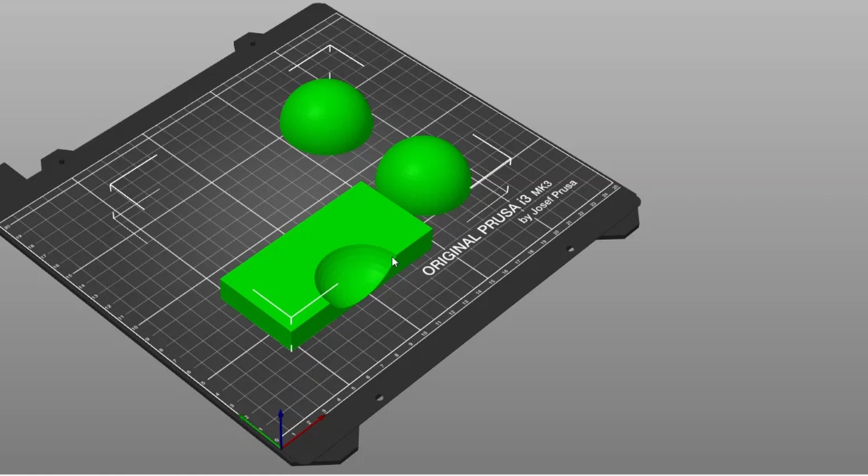But today we're going to explore something that came following the tournament. We have a group chat with all of the different players in it. One of the players, Tim Greenfield, suggested, why don't we build a rack for Lineball, so that instead of having to sort of spot the balls yourself, there could be a rack like you have with the triangle on an 8-ball table or the diamond shape on a 9-ball table.

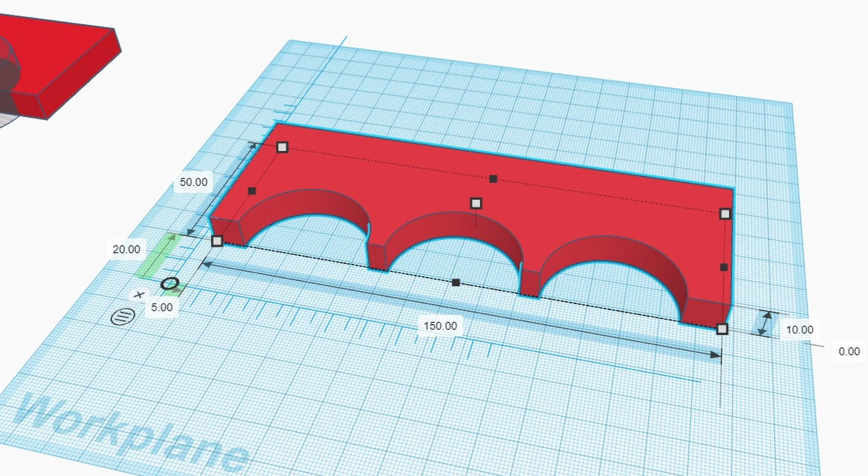So my dad, who played in the tournament, he does a lot of 3D design work. His name's Jon, and in this video he's going to be doing the first part, explaining through this 3D design he's doing for the rack for Lineball. If you don't know all the rules to Lineball, head back on the channel, watch the third ever video we did. It'll explain how to play, so you understand why we're making the rack and how he's doing it, and then come back to this video and you should have a really good idea of what Jon is doing. So let's hand over to Jon and learn more about the design.

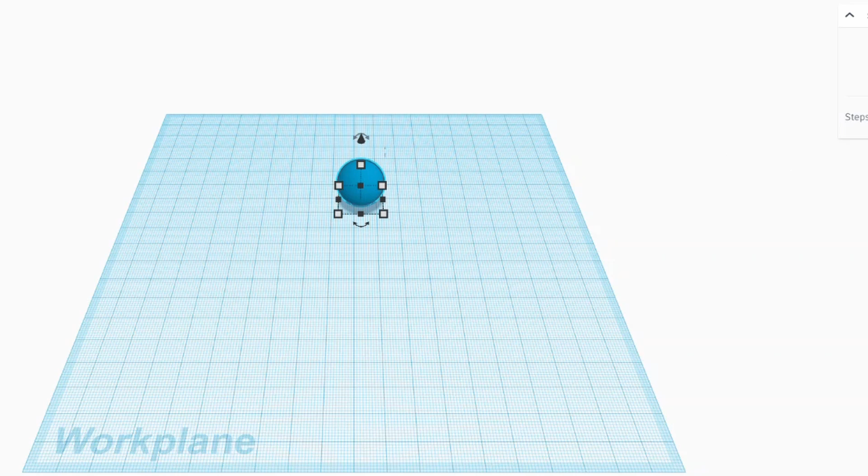So today is the day that we design the first prototype of the Lineball rack. So let's design it together. Now, to adhere to the sustainability rules, I'm going to prototype this in its smallest possible form, which is just one ball rack, so that we reduce material wastage. So first thing I'm going to do is create a ball. We'll max out the steps so it's as smooth as possible. Bring in some guides, and it's 51 by 51 by 51. So that gives us a concept of scale.

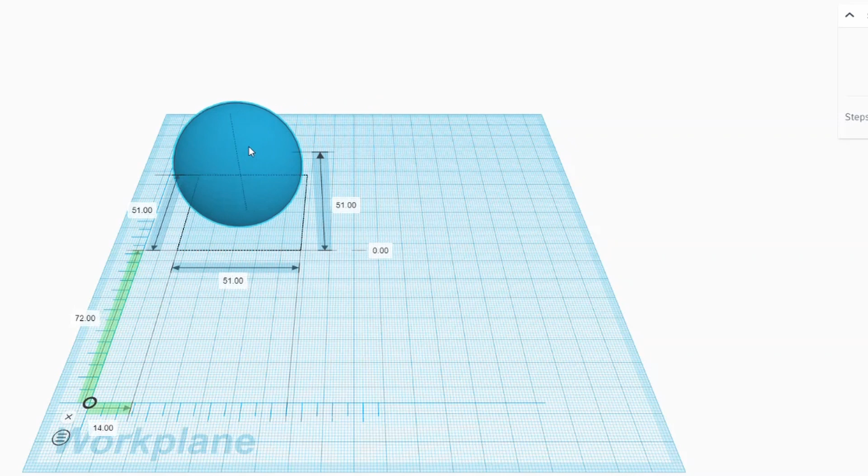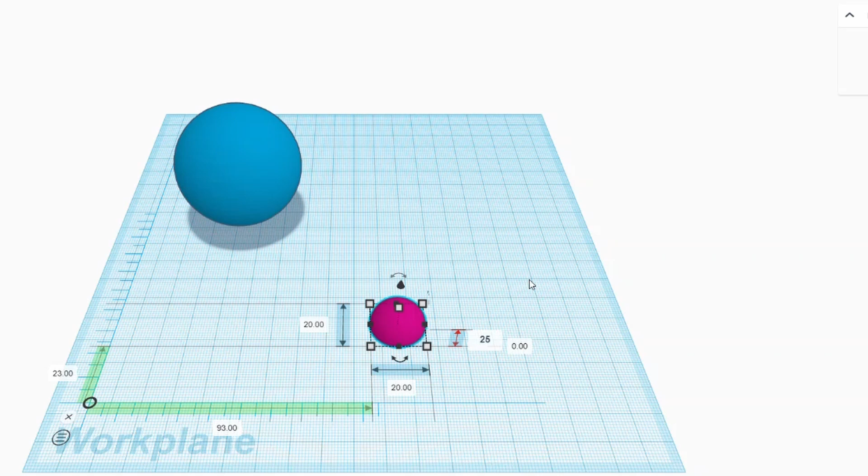For the actual ball itself, because I want to print one, I'm going to do it slightly differently. I'm going to do it in 2 halves, because printing this shape will mean we end up with a flat on it. So we need 25.5 and 51 and 51. I'll duplicate that, and I'll just hold that off the side. So I'm going to print 2 of those, stick them together, and that gives us our ball.

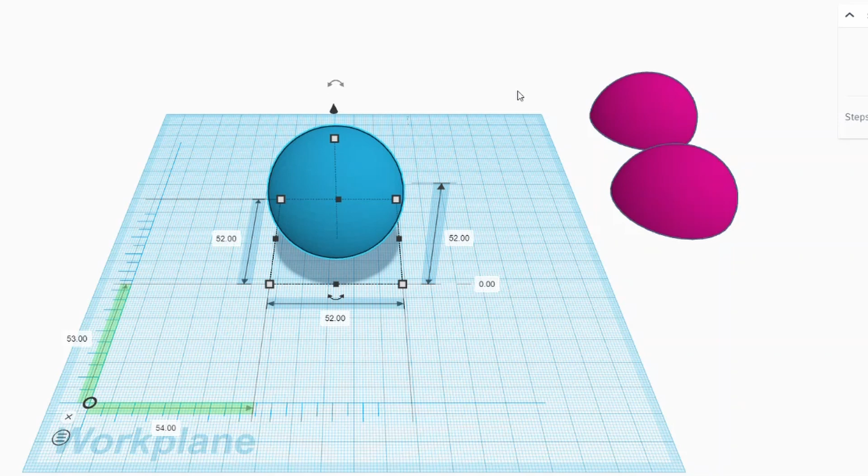Now for the actual rack, I'm going to do something slightly different because we need a bit of clearance. So I'm going to give the pocket 1mm clearance all round, I think, so there's a slight bit of play in it. So we're going to make the ball 52, and then that we will turn from a solid to a cutter. So there's our cutter. What we're going to do is bring out the beginnings of the rack.

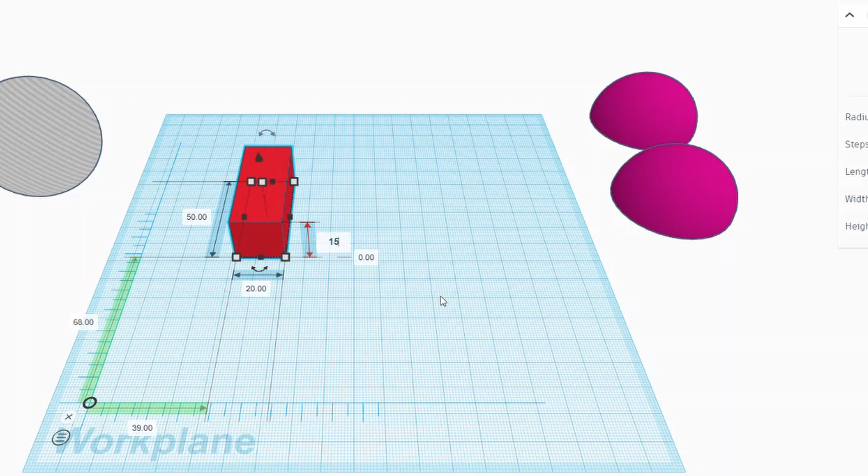We'll make that 50 for argument's sake, because it might as well be anything. I don't think it needs to be more than, say, 20mm high maybe. No, it's probably too high. Let's make it 15. And we'll make it 100 wide, just to give us a bit of play. Then my thought process was we really need to set this back into the pocket a proportion of the ball, so that it's locating it nice and neatly, but at the same time when the rack is pulled back it will clear perfectly.

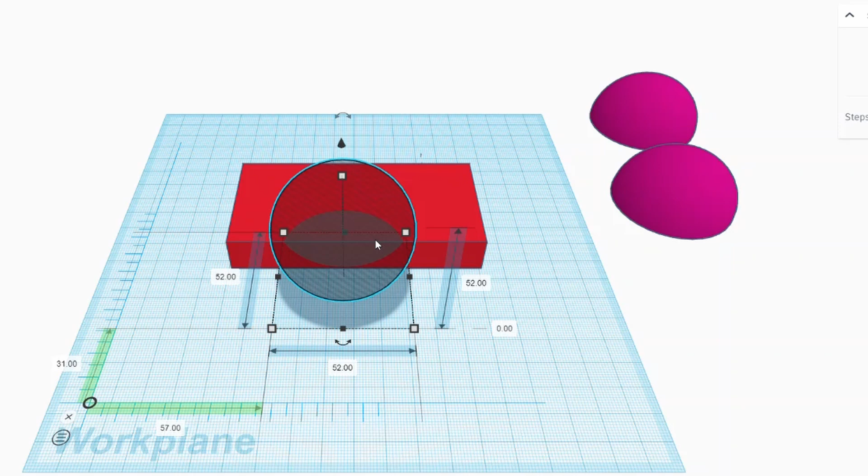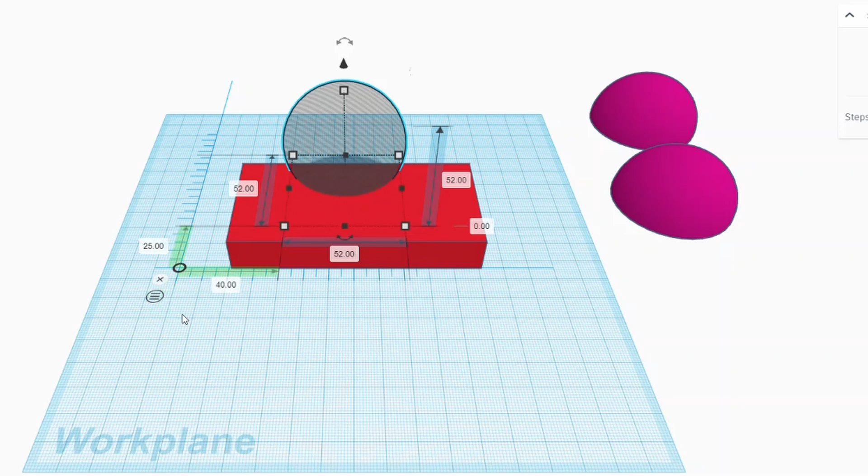So a quarter of the distance, if we just zero this out on the actual rack itself, so it's zeroed out, and then what have we got there? 31. So if we went, just for argument's sake, 25, just to get some. Oops, sorry, got the wrong dimension there. What we're looking at here.

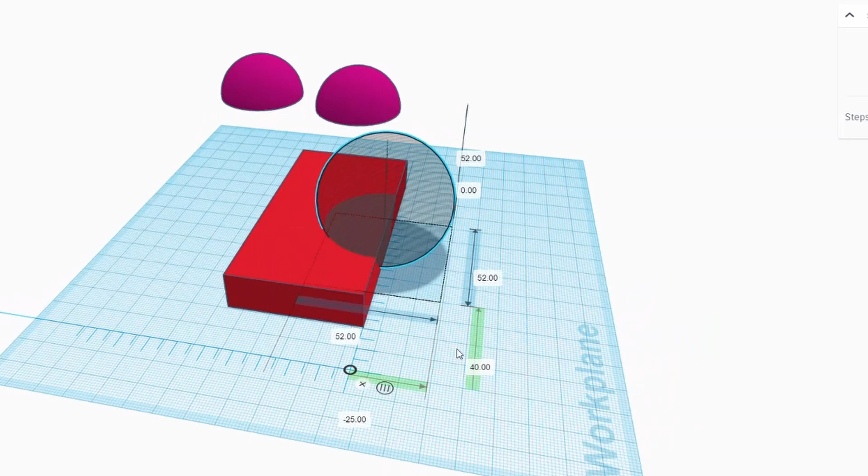Sorry, minus 25. Okay, that in theory is roughly half plus that little bit of clearance. So I think for the first test run, I'm going to run with this. Let's just have a look.

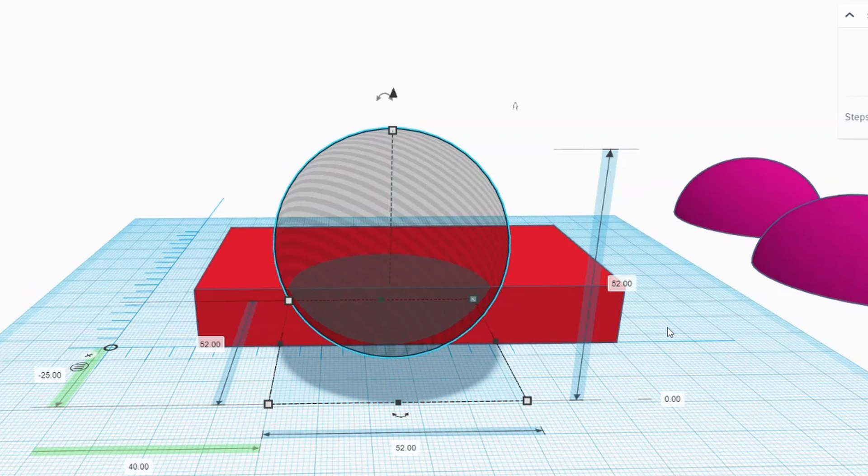So it's perfectly on the base layer. Perfectly on that base layer there. It's a half cut. As that is drawn away, I would imagine that shouldn't tip the ball too severely, but we will find out because this is trial and error.

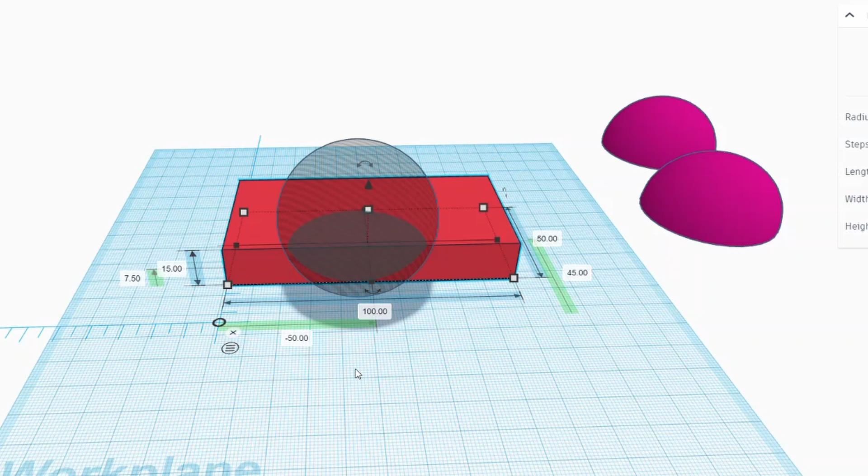Now we want to centre that really, so if we switch to centres, we'll set that to 0, sorry 20, so that's there. We'll just come in here like so, so that's minus 50, and I should centre this, that's 50, so that needs to be 50. No, minus 50. So that's centered on there.

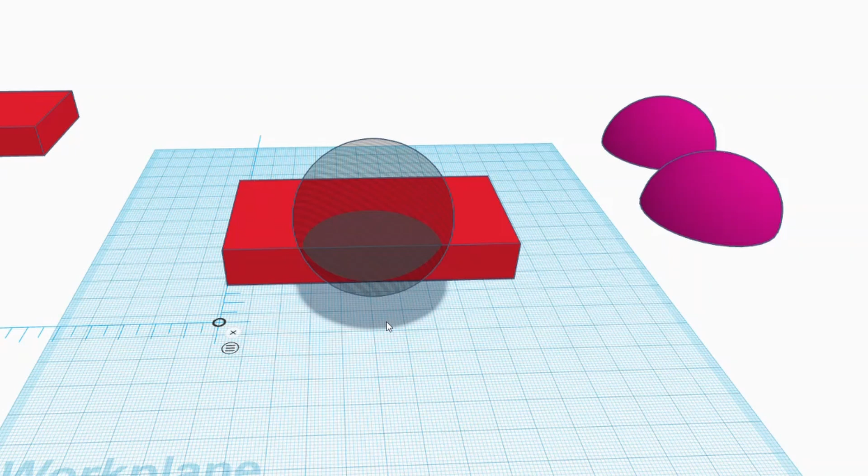So what we'll do now, we'll just save that and dupe it so that we can come back to that at a later date. We'll now cut that. That gives that pocket. Right, so that's test number 1. I need to print the ball at the same time. So I'll just bring that in and we'll do that as a single print run. Group that lot and export. Now what I want to do, STL, sorry, that's what I want.

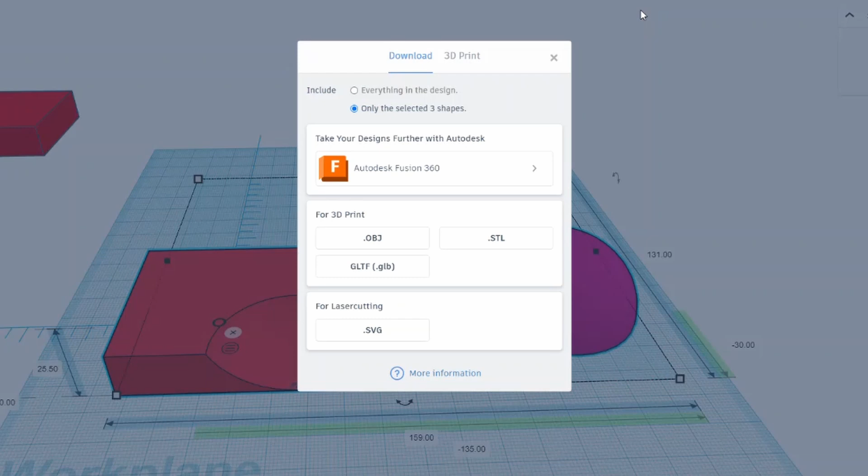Now I may need to switch windows with the screen recorder because this is now going to open in Prusa Slicer, which you guys might want to take a look at. There we go. Now my guess thinking about this is that there may well be way too much surface contact on this area of the ball, so when it pulls away it may try to kind of roll the ball forwards.

If that's the case but it holds the ball nice and squarely, then the idea is I'll probably add just a couple of tiny dimples, one to the back and one at about maybe 15 degrees on each of these faces, so that there's actually no surface contact at all. It's only point contact in 3 places. Therefore there should be virtually no friction. It should clear a little bit better, maybe.

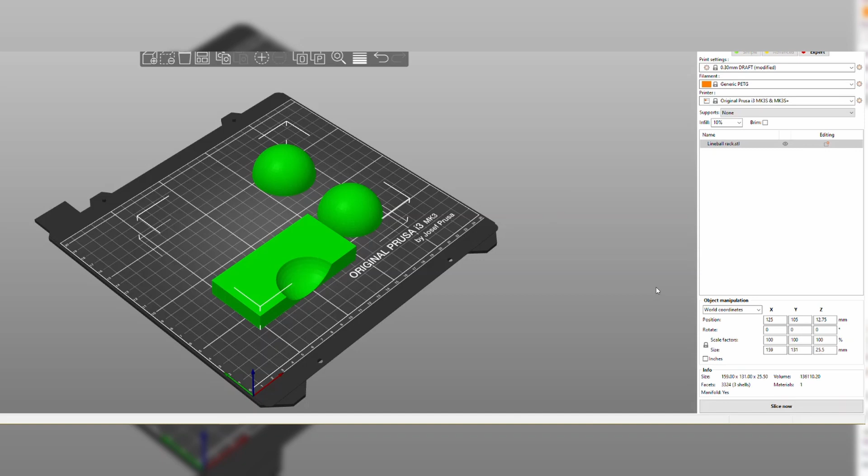So anyway, this is the first test, and we'll see where we end up with this. I'd imagine we'll go through 3 or 4 iterations to get it right. So we're going to put this into draft mode to reduce material consumption. Infill we're going to take right down, so we probably don't need to infill more than 10%. Again, saving material. Now slice that. Sorry, select and slice.

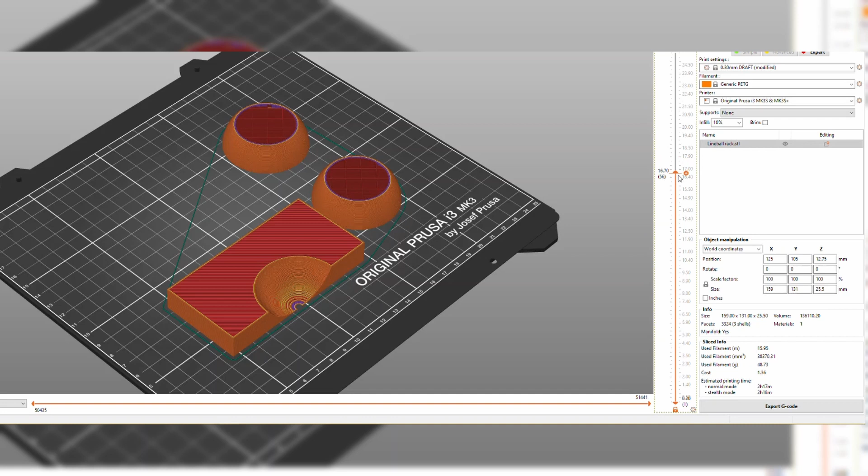Right, so there's our slice. The 0.3 mil is going to give us a bit of a flat spot on here. We can sand that down if necessary. So let's just have a look at what that looks like as a run through. There's hardly any material in there. We're not going to use much material for this tool. Should be pretty quick. And on my machine set to stealth mode, it's going to take 2 hours and 18 minutes to achieve that. So that's the end of this.

I'll do a little video clip of the printer in operation actually producing this, which you might like to see, and then we'll do some tests tonight and see what the start point is. I'm about 30% that it will work in its current design, because I think there's too much surface area.

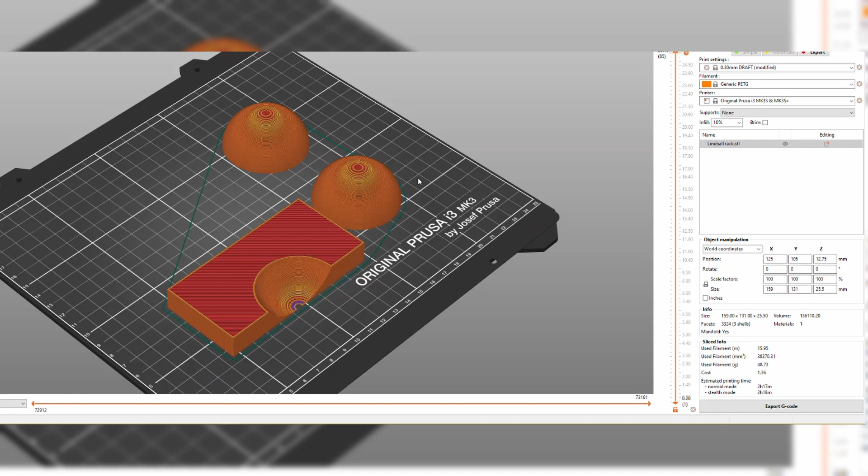I think what I'll have to do is place a cut into the base here, so there's a 0 contact point here, and as I say, 3 tiny dimples here and here, so there's no surface contact, but obviously those dimples will be held perfectly in 3-dimensional space. And the mass of the ball, hopefully, you know, this won't be very heavy, but the mass of the real ball should work in our favour, and time will tell. So I'll export that, set it up for print, and you guys can see that later.